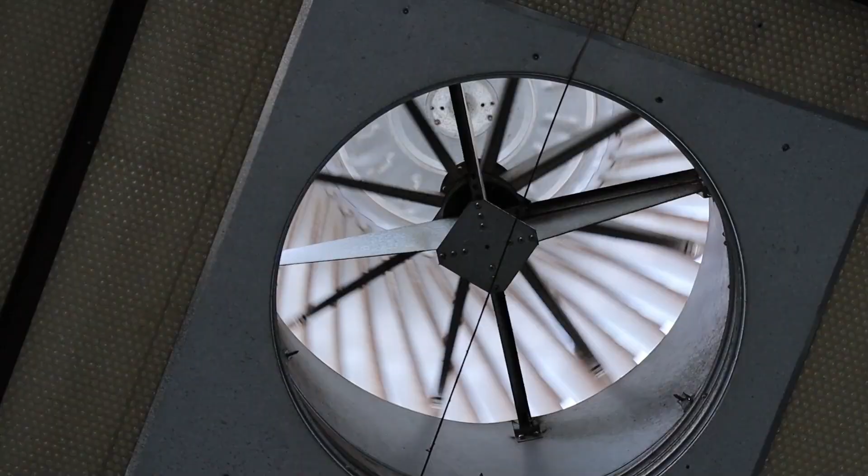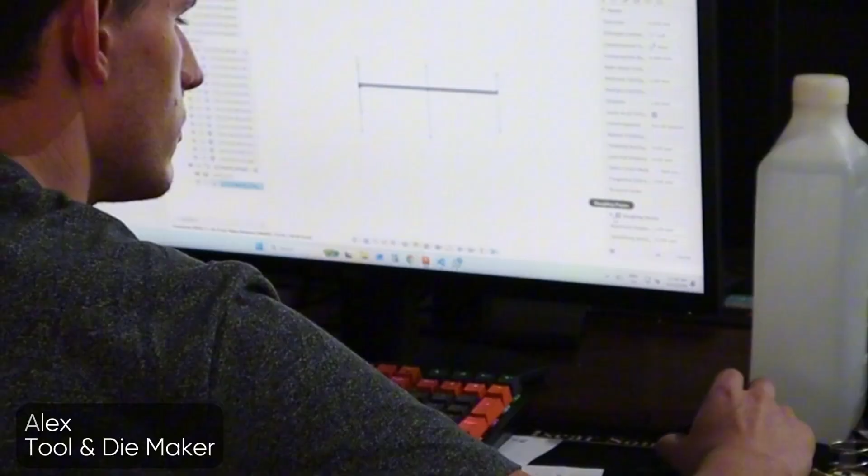I think this program took me about 15 hours. This is how the actual part will look. I'll show you, and this is the stock setup. That's the billet we use, we're going to cut it out of this. This is a simulation of what the tools will actually do, on this body.

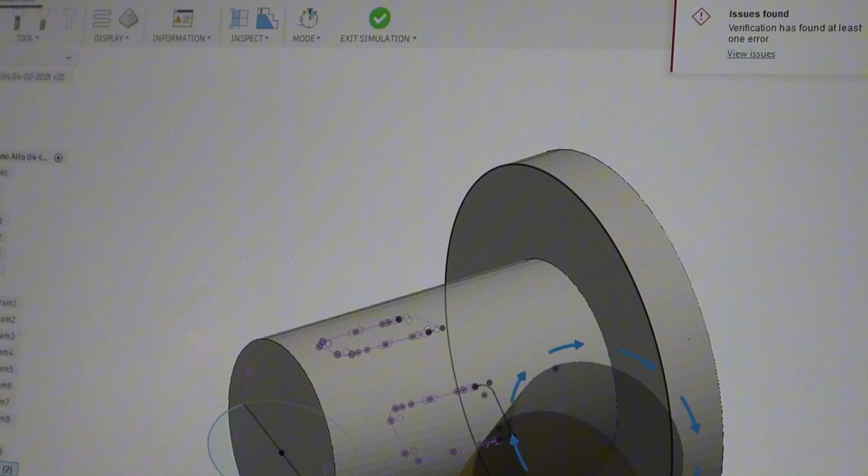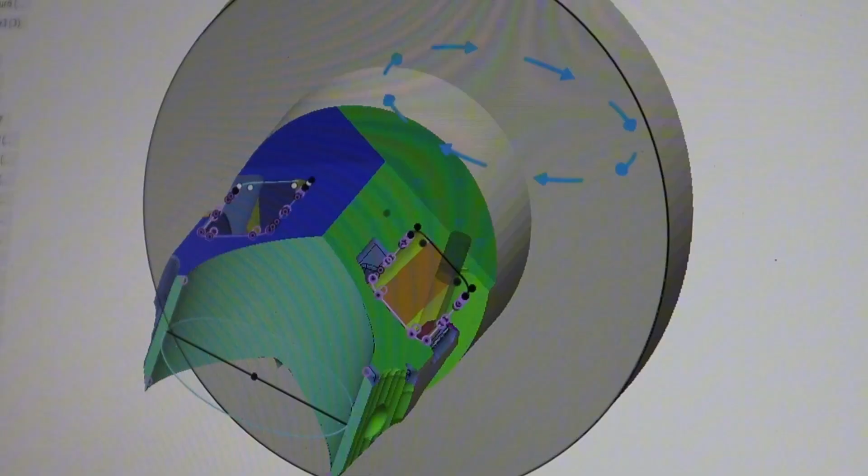I do the whole program, telling each tool exactly what to do, so it takes quite some time. Once you have the program, you save it and keep it. There's a lot of tool paths, like here - this is called the tool path. You have to create each and every tool path from scratch. Look how many there are.

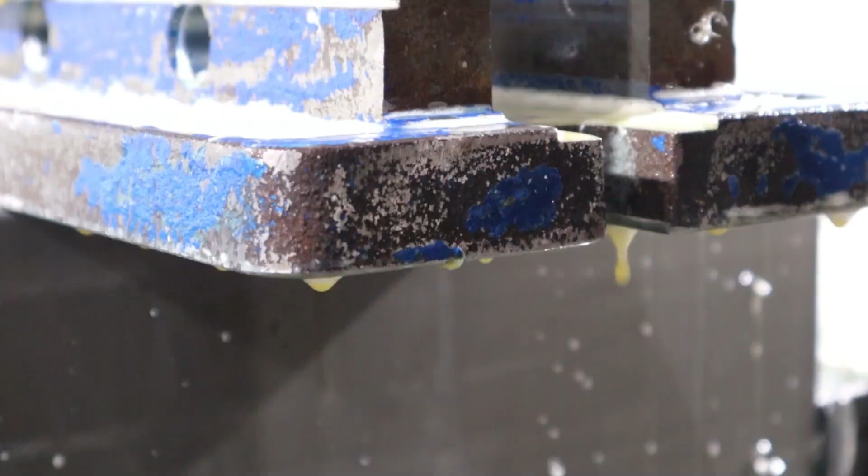I've been in this industry for 9 years. I would say around 2 to 3 years you get the hang of it. You get experienced, you get used to the machining, the types of machining you want to do. But I learn every day.

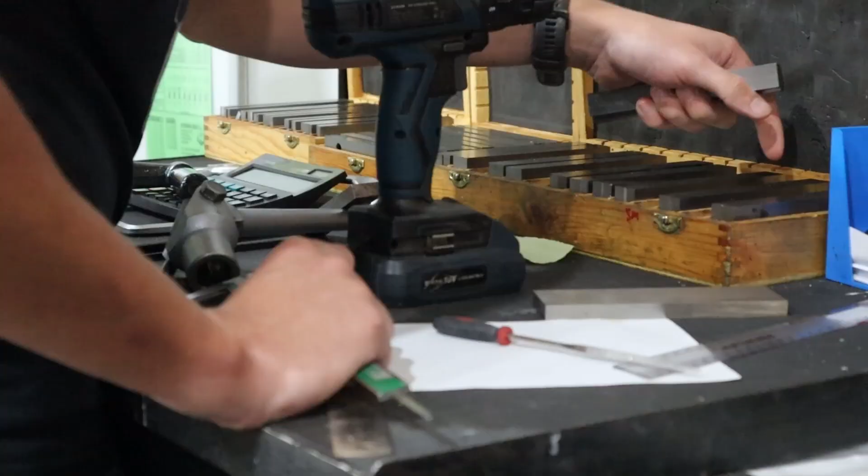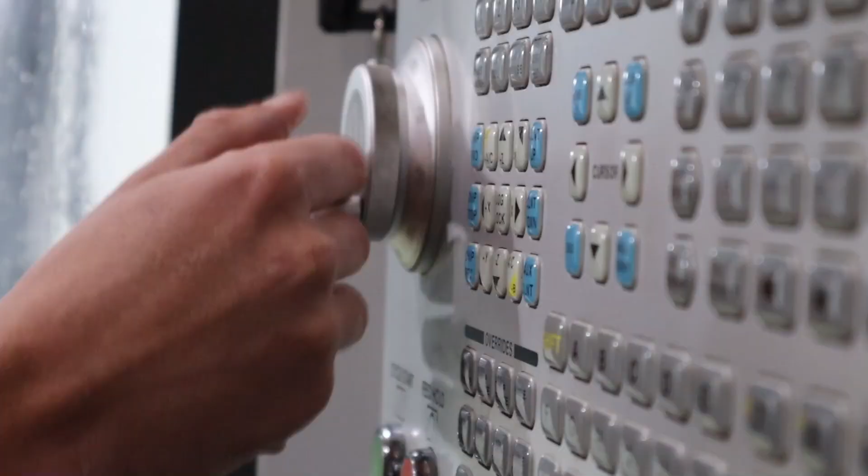The training was about 2 years just to know the basic stuff. But I think this industry is more hands-on experience - you build experience over time and learn as you go. A lot of places have on-the-job training, so I think that's very important and necessary. There's no way you can learn this in a class and get to a workplace environment and be able to do everything.

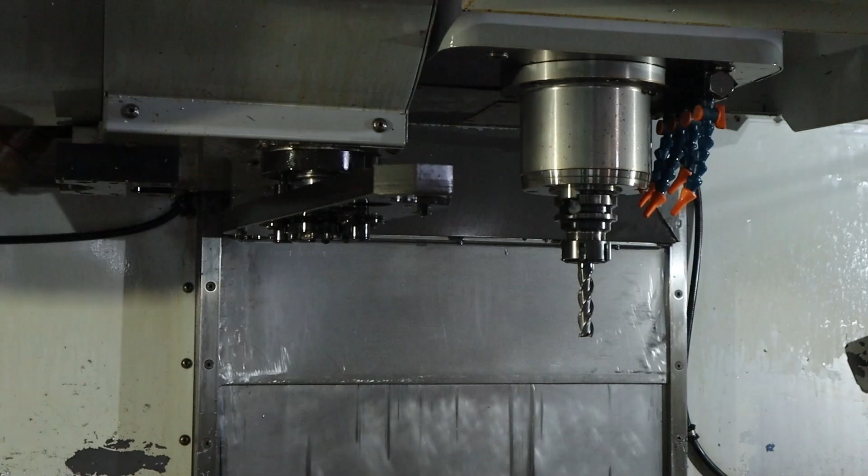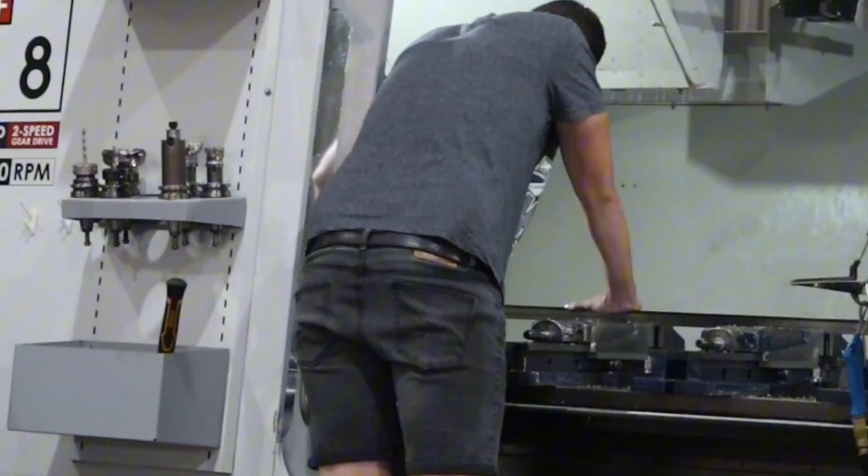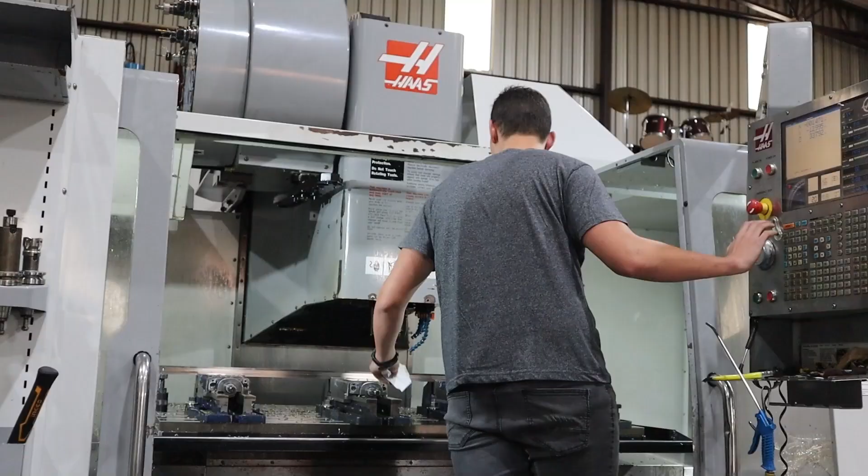I think the scariest thing for me was the bigger the machine, the scarier it felt. The first time working on this machine was very scary because you feel like you have to check everything, everywhere. Do you worry more about getting the part wrong, or damaging the machine? Damaging the machine, because you can always remake a part. But if you damage the machine, it's a lot of money to fix. You must just be vigilant and stay focused.

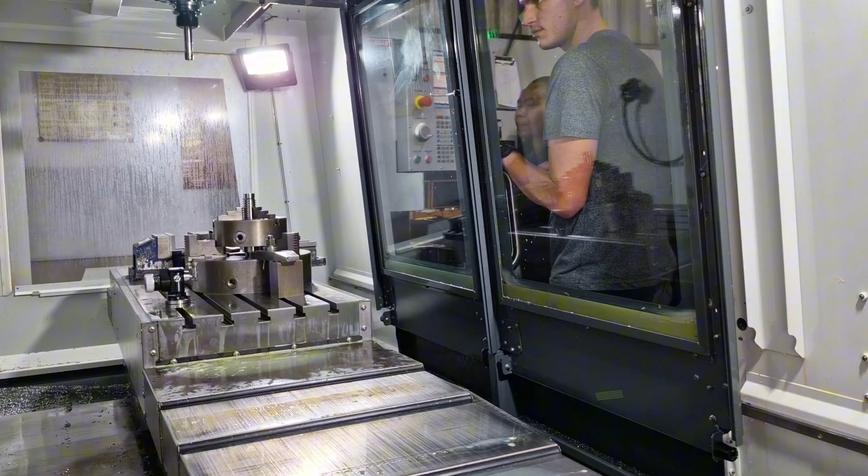People grow quite fast because we give them opportunities to learn. She started as a cleaner and now she's a basic setter. She can do basic setups and all that. I would say in 3 to 5 years she'll be at a level where you can give her a job and leave her to do it herself.

After school, I went to the Army National Service for 2 years. Then LIW, a division of what's now Lyttelton Engineering Works, were looking for apprentices. That's where I started, got my training from LIW. In the interview, I wanted to do tool making, and they said to me, no, there's no tool making positions available - they are filled. Am I interested in what they call...

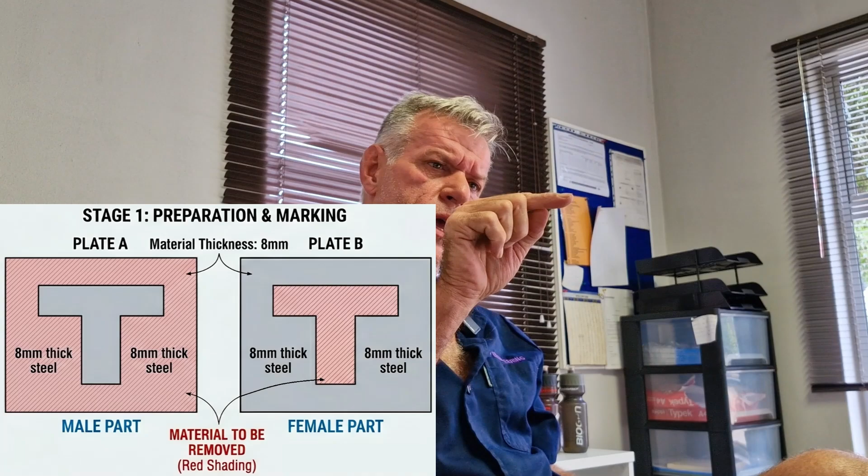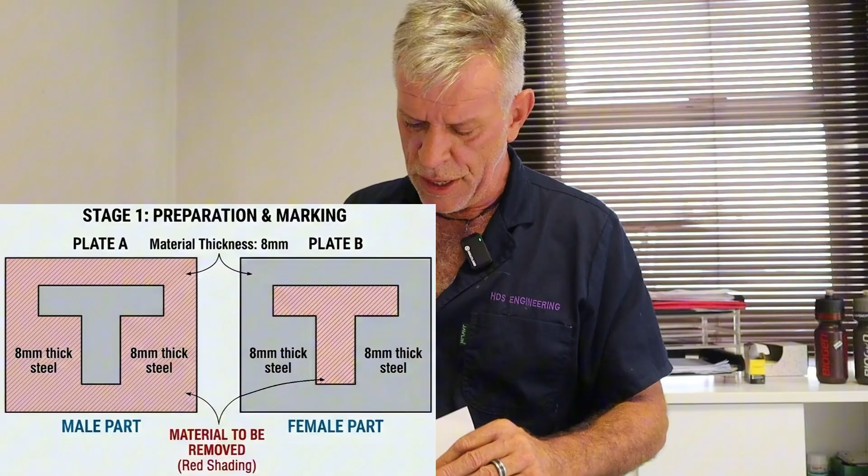The first section, you get two blockies, 8 mil thick. Then you mark out a T in the blocky, and then remove that section. On the other one, you've got to cut that T out. That's with a drill, a hacksaw, and a set of files. Then you've got to make the T fit into the cavity.

If there's a gap anywhere more than 0.1, and this is how they check it - this is roughly 0.1, the thickness of this paper. They use paper. If your paper goes through, it's no good, you've got to do it over. I was allergic to files after the second week, but nobody got it right the first time.

That was the first practical training job. What was the most precise you ever had to be in training? About 50 microns, doing a job within 50 microns. That was quite a challenge because we used to do that on manual machines.

If you want to move the cutting tool forward by 0.1, you put a clock on and move exactly 0.1. You cannot work on the dials of the machine because they're not true and accurate. I think they did it on purpose. They don't let the guys work on faultless new machines.

They want to give you a challenge, to see have you mastered the skills. Can you do the job? Can you think out of the box?

How long did it take you to get good? I'd say after my 8th year at Denel, I was quite confident - I would regard myself as good enough to do the job. There's always room for growth, and like everything, it's progressive. The more you do it, the better you become. There's so much to learn. In this trade, you will never know everything.

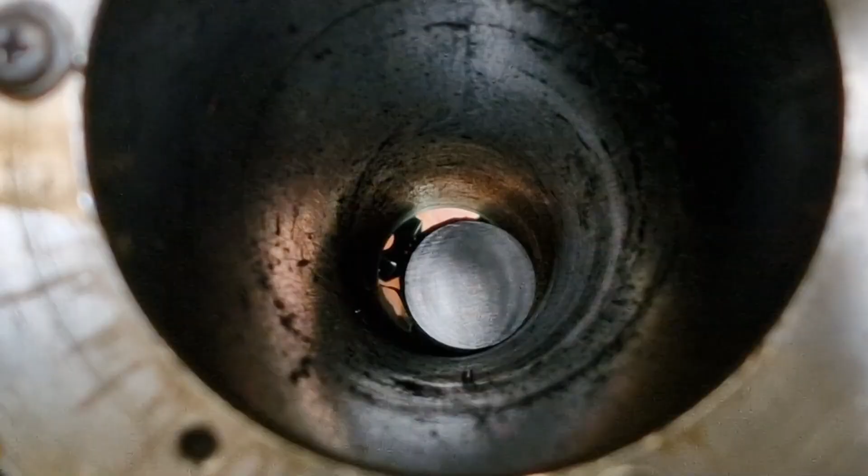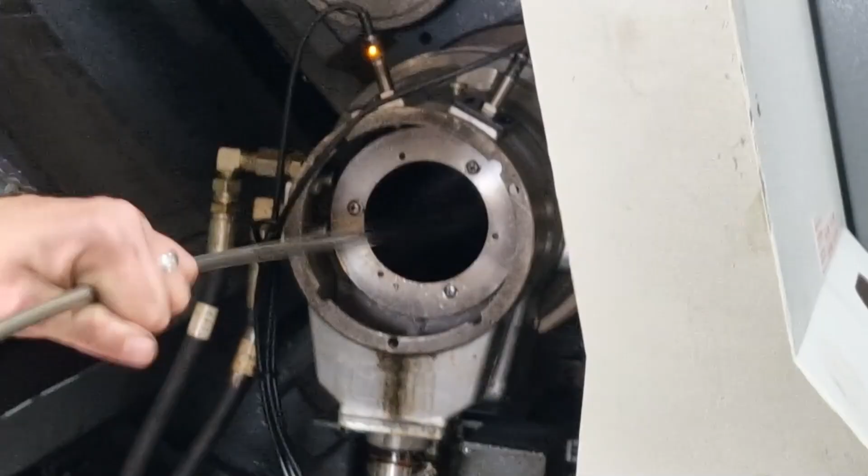Usually I'll just run it at high RPM to see how the centrifugal force is and check the machine doesn't shake or anything. You can feel it - you can actually feel it.

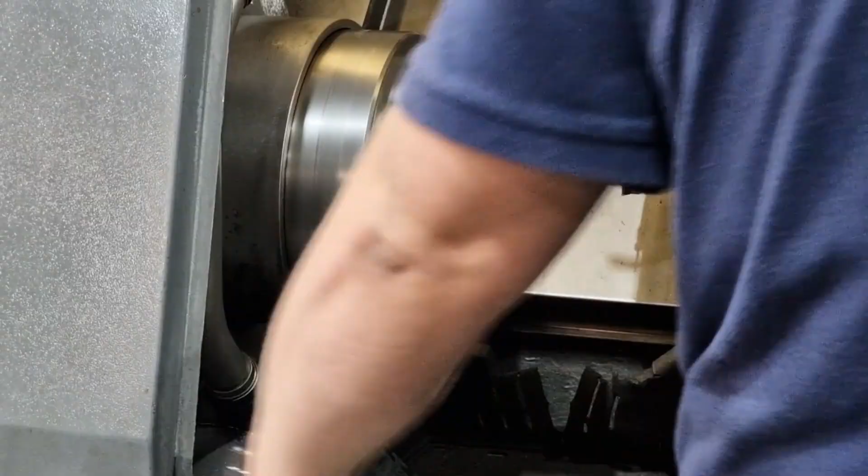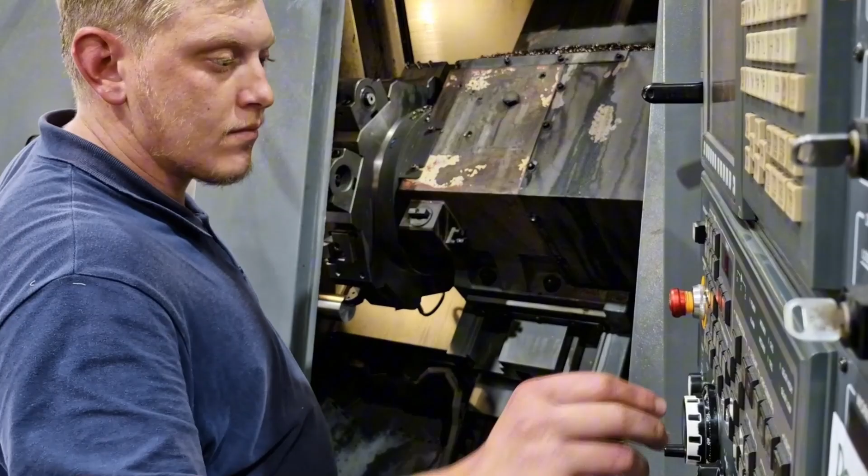I'm old school, I'm still using a piece of paper. How do they do it nowadays? They have probes and everything.

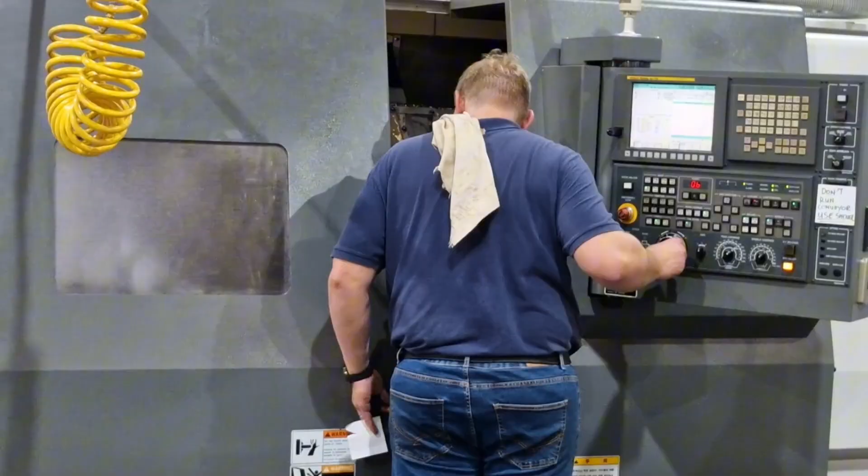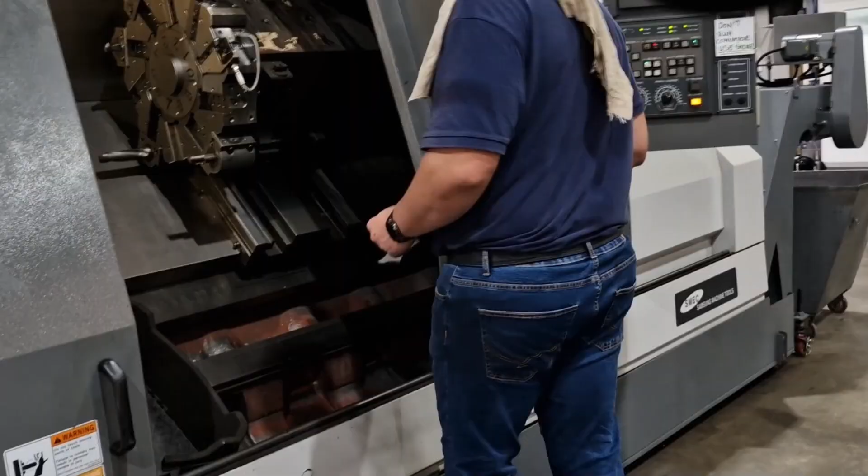I see. All sorted, all set up, yeah. Right.

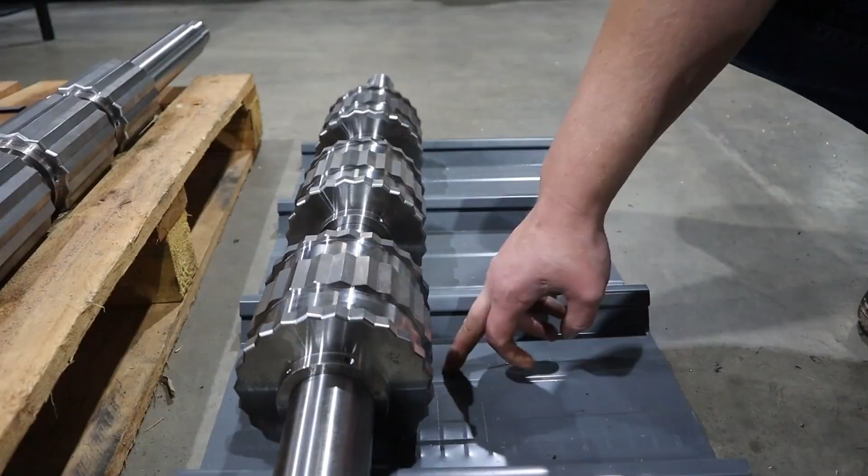This we call stiffening ribs. I made a whole set as well that rolls out this whole form, but this one puts in more ribs like this. So this is actually for a machine.

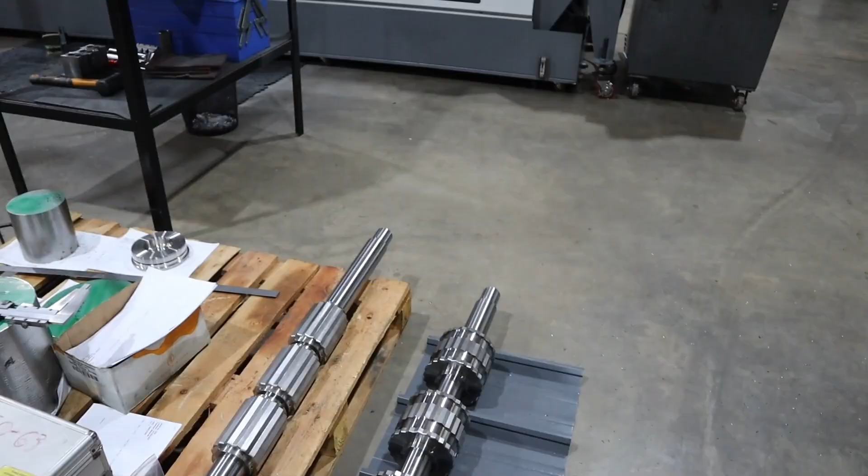What happens if one of these is wrong? I try not to make a mistake, but sometimes something does happen. Maybe we're lucky, maybe we can change the design, maybe the client will be happy. But we never send something out the door that's wrong, ever. We'd rather buy the material and do it over again to make sure it's right.

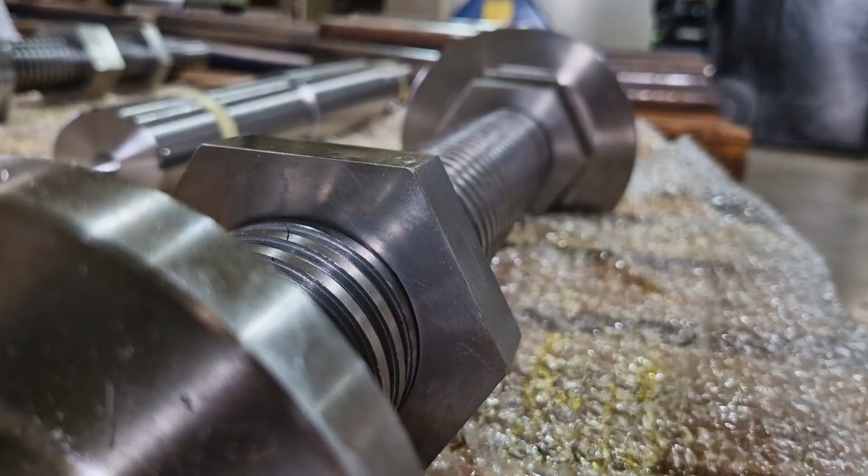If I know a job is unfixable, I won't even try fixing it. I'll start again, at my own cost. Sometimes, yeah, sometimes we're lucky.

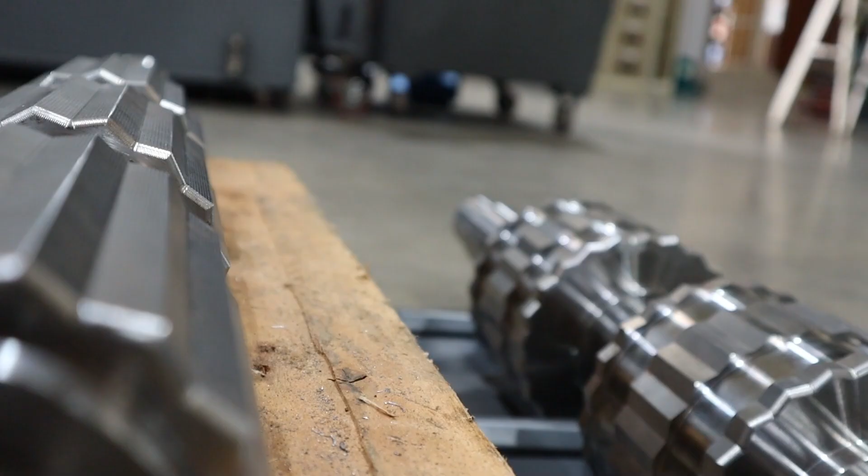To me, it's very satisfactory. At the end, when you do a job and it's perfect, according to drawing, and it goes out that door, and the client comes and says 'thank you' - it's not just a job. I can create something that can bring a hell of a lot of benefit to other people.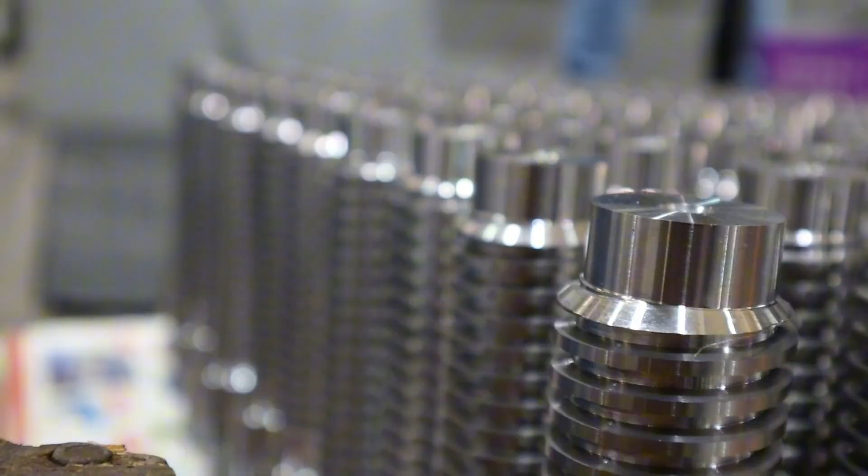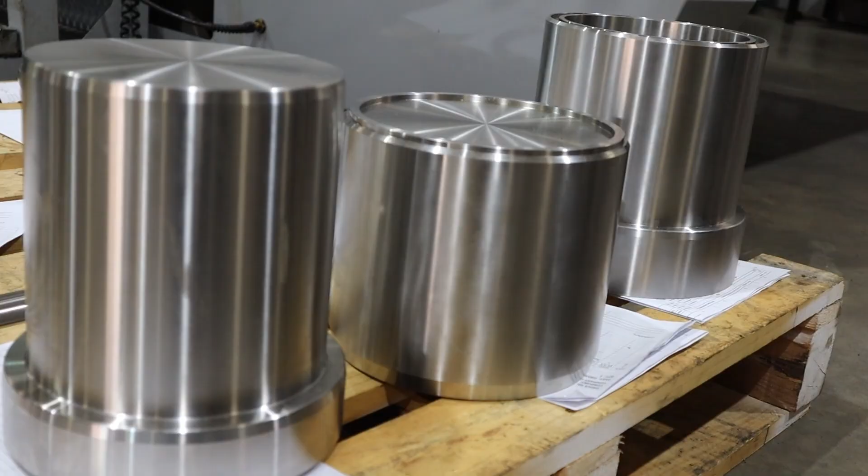All of our components get fitted into a next level of something - either a car, a machine, or this. And that next level of something creates jobs for that group of people. That guy can now make money with his machine and he can employ people. But he depends on me.

My parts need to be correct, otherwise his assembly is not going to work, so his business is going to be messed up.

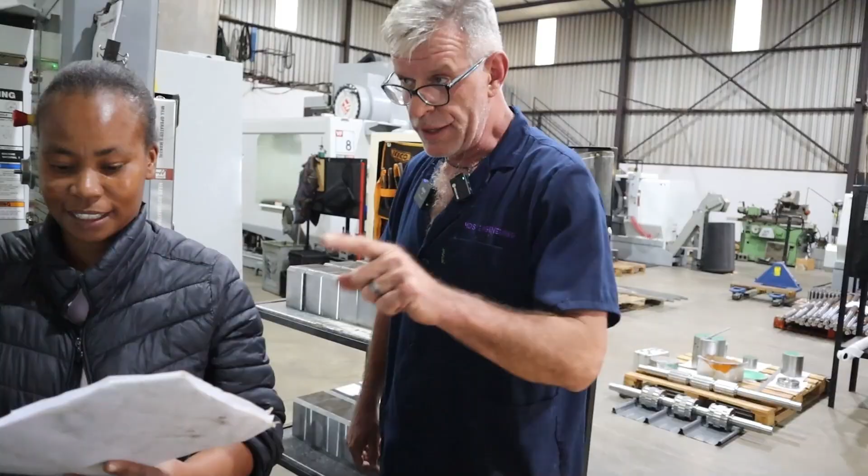You sure they're right? So what happens if the quality inspector comes and picks one up, measures it, and it's not according to specification? They're going to reject the whole order - they'll reject the whole bunch. This is the engineering Bible, the drawing.